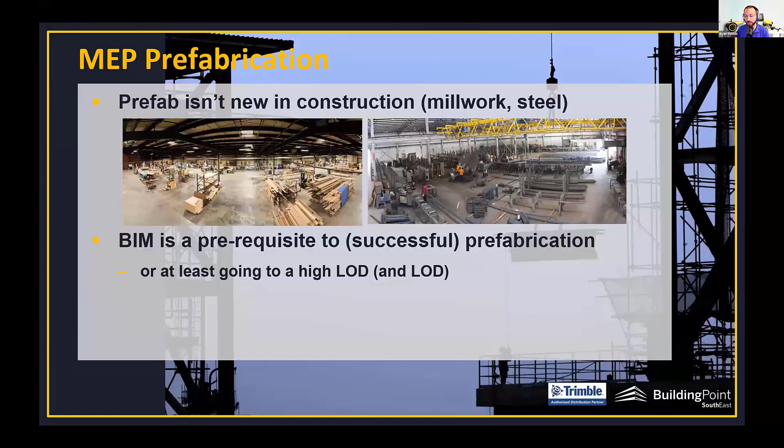You can just start with spooling. These sub assemblies aren't huge, but they're easy to start from, and we'll talk about the benefits later. Like Andrew said earlier, the technology really lends itself to enabling a lot of this. When you go to a higher level of detail in your models and drawings, you can start extracting a lot more value beyond just the spatial coordination of it.

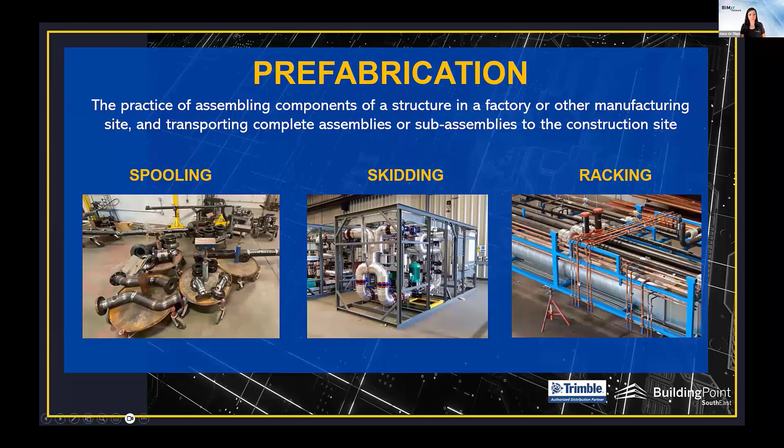So that's actually what we had our last round of local meetings on, was Atrium Health and their racks that they did for a hospital project for Atrium Health, as I mentioned. We may get that one online and recorded.

But can you talk to another project that you've worked with or that you've seen that used... or maybe you'll get to it? Yeah, there's one right here.

So this was a project we did with some of the team members, or board members at Clancy. Shout out to Zach, he was the BIM coordinator on this one. I was doing modeling for Warwick Mechanical Group. This was a project, and they actually sent me a plaque, the Hampton Virginia Aquaplex, over there by the coast.

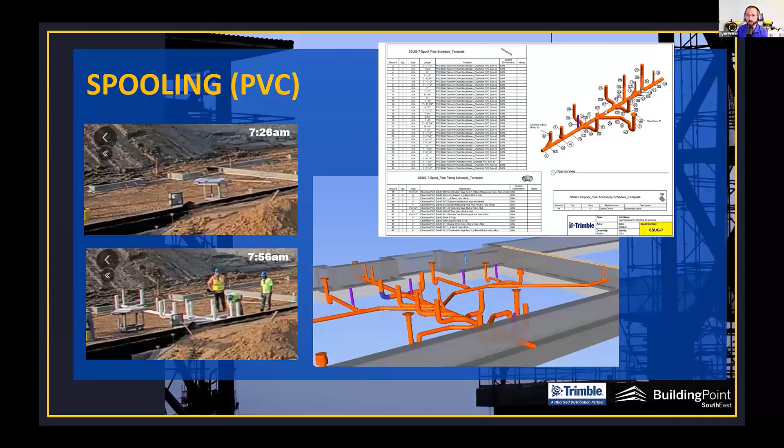But anyway, similar process. We are kind of a Trimble house, so we specifically use SysQue for most of our projects. You can see the level of detail we go to on the modeling side, even showing the exact thickness of that weld and leaving a gap and all that, really collaborating. That's one huge part of the process, collaborating between the office and field side, really saying, hey, what are we doing here?

What do you prefer? There's different options, or hey, that's not going to work. We've got a certain head height, we've got a certain suction distance we need off a pump. You really got to delve into the details of the submittals to really make sure

that all the T's are crossed and the I's are dotted. In the center there, you can kind of see that was like early stages of, going back to my AR presentation, overlaying digital geometry on top of the real world. We kind of did it there in the prefab shop. And then on the bottom right, you can see he was the BIM coordinator for that project. So I brought him into that mechanical room as we were doing the installation, and showed him, hey, this is what kind of has to go left, showing that whole room, but how detailed we had the model, and how closely we were following the model and all that.

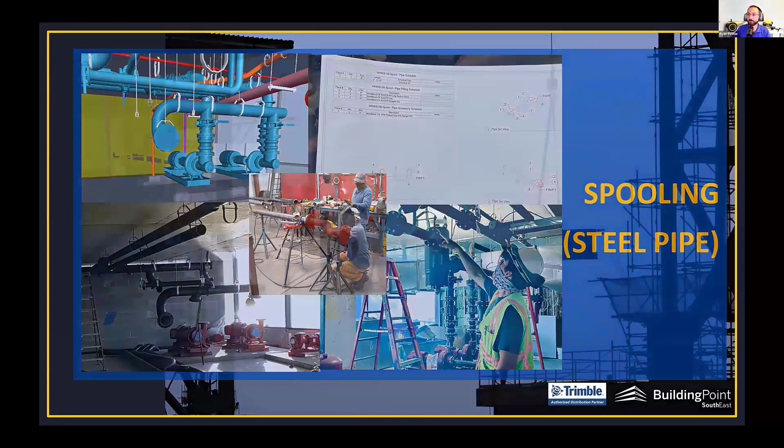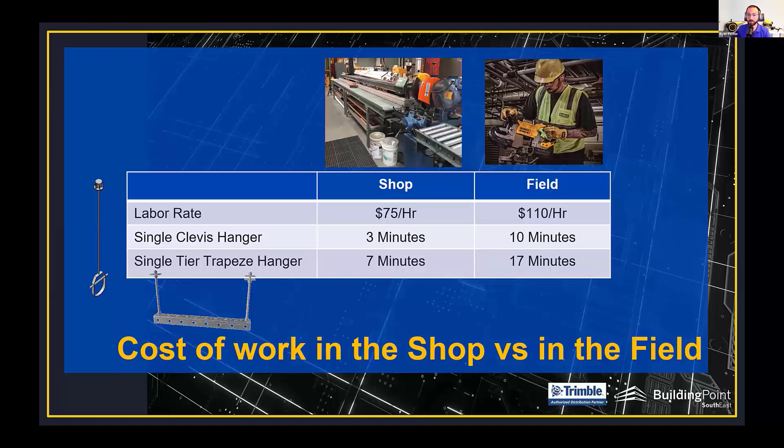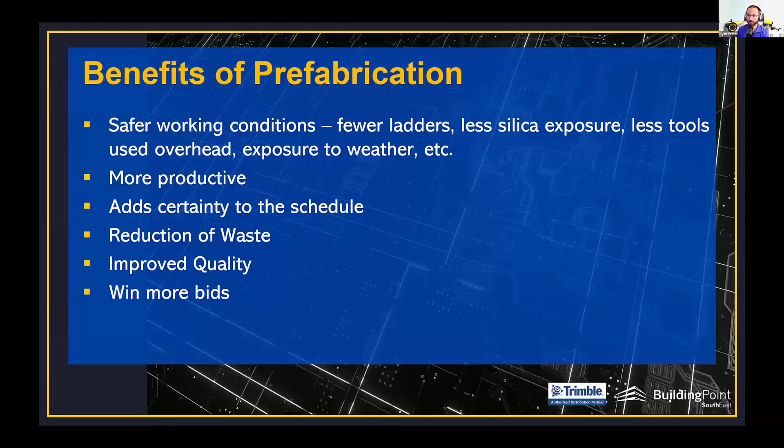And then obviously improved quality. And then at the end of the day, you're winning more bids and winning more work and being more profitable. So just like Andrew had, I've got a ton of options.

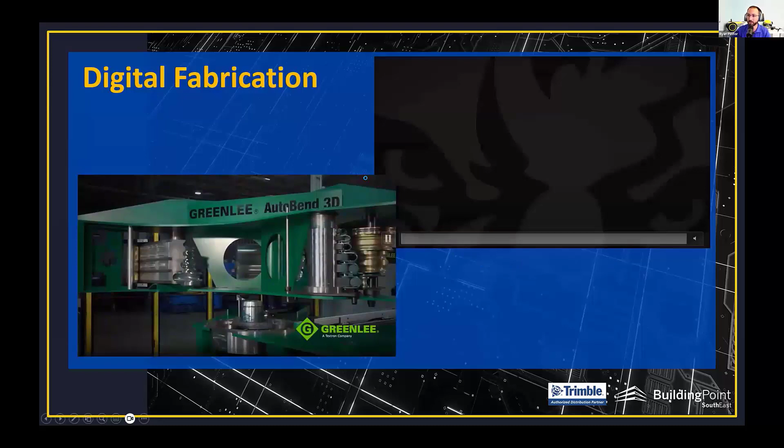And then just a couple of these animations. I think he talked about the TigerStop. This is just an animation of what the TigerStop is. So you have all this AI and BIM, right? That used to be a buzzword.

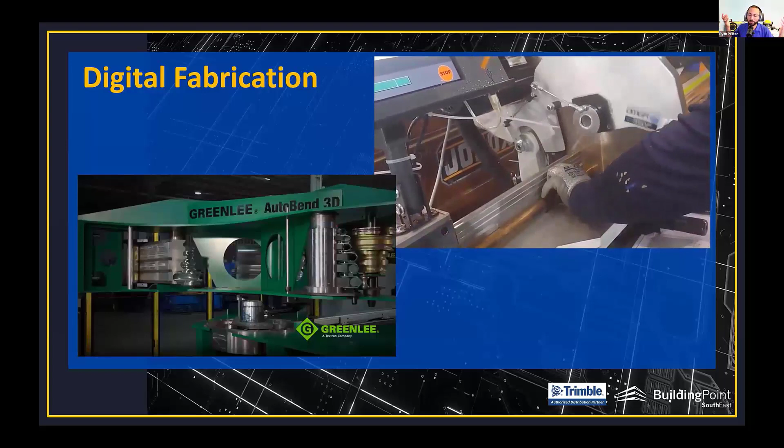Now we have new buzzwords like digital twin, but this is kind of the I in BIM coming to life, where you have all this information in the model, and you can see that cut end right there - that's your waste.

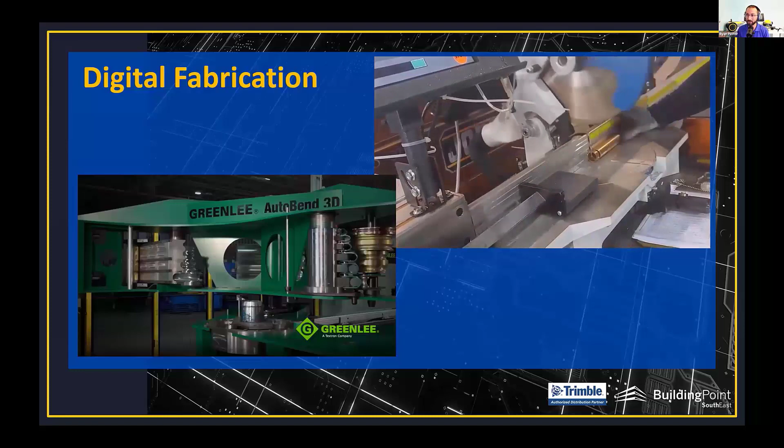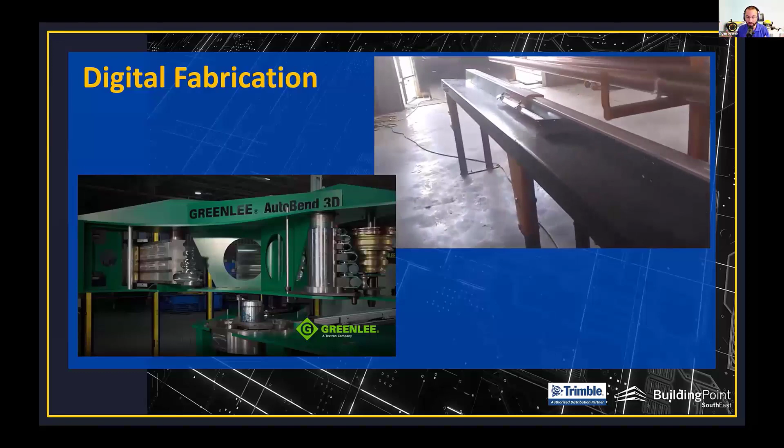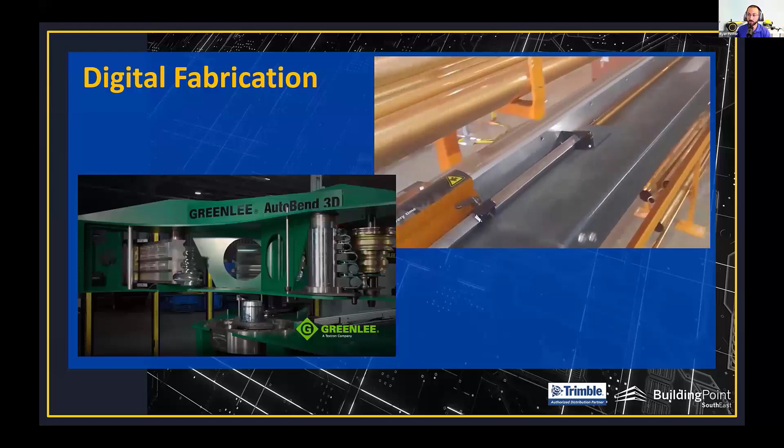It goes through and all the algorithms can crunch the numbers. You can put your pipe length in there and it can say, okay, cut this one to this one. Then you're putting specific pieces of stickers on there to show, hey, this is where this part and piece goes. Then you can start wrapping those in kits and delivering them to the site, as shown there. So you don't even have to be spooling to do something like this - you can just take the information from the BIM and do something like that.

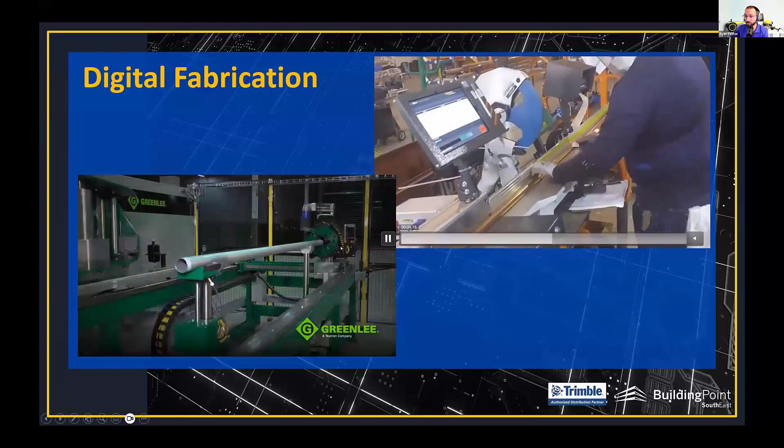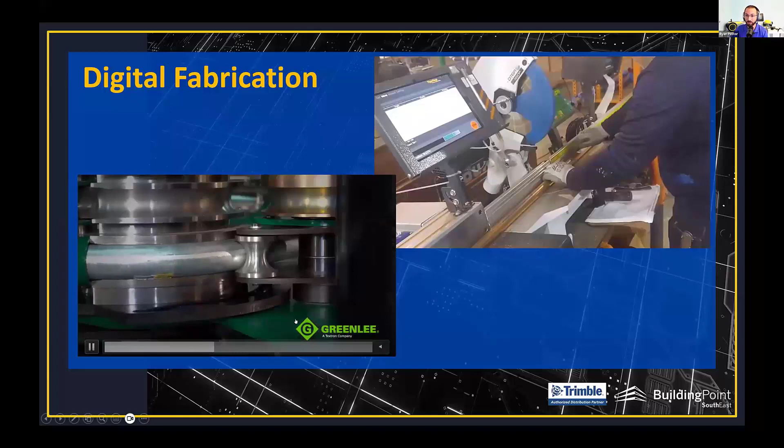And then for the electrical folks, it's overlaying - there we go - just automatic benders of pipe, conduit, different things like that, where you really can take the guesswork out of it and really enable your teams to be set up for success.

So that's all I got.

Looks like there's a few questions regarding the kind of relationship that you had with the A&E - architects, MEP, those types of people within the scope.

Yeah, so a lot of the contracting methods were not design build. A lot of what we did as a third party was more like a design assist. It really depended more on the relationship, and I think Dan Morin has a whole presentation about this - I think he did it at a Clemson BIM symposium one time - but really, don't ignore the contracting method, but as long as you have a good relationship with the teams, that's really more what it's all about.

And showing that you give a crap and want to do something with excellence - as long as everybody's really striving for that, I think that's the goal. I've never really been part of a project that has had true co-authoring from design down to the MEP side. Those are usually saved for bigger projects and things like that, so I haven't had that opportunity, but knowing that exists, there's definitely a lot of benefit to working together.